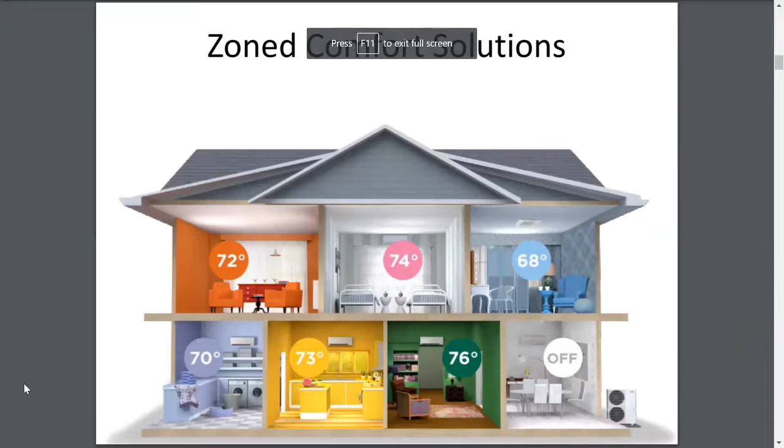Okay, Sean was talking a little bit about COP, coefficient of performance. I just threw this slide in here real quickly, but what we're talking about here is if you put 1 unit of energy into a system, how much are you getting out? In this example, it says 1 kilowatt of power coming into a heat pump and 4 kilowatts of energy coming out. So that would be a coefficient of performance of 4.

A more traditional electric system, non-mini split, would probably have a coefficient of 1. So you can see the efficiency differences are pretty significant. We're looking at 2.7 roughly to 4.8 in the equipment we're selling in the US. We do have one in Japan. I got an email this morning, I think it's 5.22, and it's running on R32 refrigerant versus R410A.

And we haven't brought that to the US. It's possible we could, but the unit is actually much bigger. So they think that aesthetically it may not be well received here right now. The Daikin, we got specs from them, and they had a mini split that was using R32 that had a COP, and we understand it's not exactly clear if their COP is the exact same testing regimen as our COP, but within that context, it was 5.8.

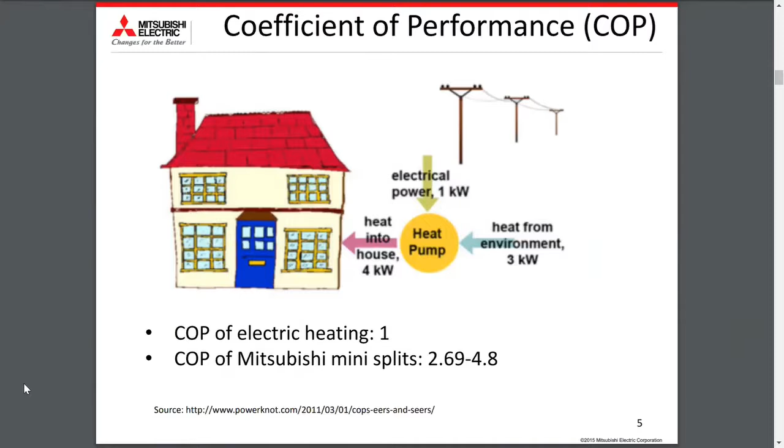Okay, yeah, that's very high. And I think they're one of the leaders in R32, so that could be part of it. That's their stuff, actually. Yep. Next, please. What is R32? It's a refrigerant. I mean, chemically, what is it? Sorry, I don't know. Sean, do you know? That's a long name. Yeah, it's supposed to be better in terms of GHGs.

Another point I wanted to make is, what makes these efficient is that we use inverter technology, and we have a very soft start. I don't know if any of you have traditional systems that when your air conditioning kicks in, you hear a loud boom.

I have one of those. It's right outside my bedroom window. It's not great in the middle of the night.

When ours start, they're very quiet, generally running about 3 amps only. So we call it the soft start. Then they ramp up, they hit the set point, and then they modulate around it, almost like a car on cruise control. Versus a traditional system, it would be fully on, 100%, off. Hits a set point, turns off. Waits for the temperature to drift, turns back on full speed. So think of it like a Prius versus somebody pedal to the metal and screeching on the brakes every time. Big difference there. Next, please.

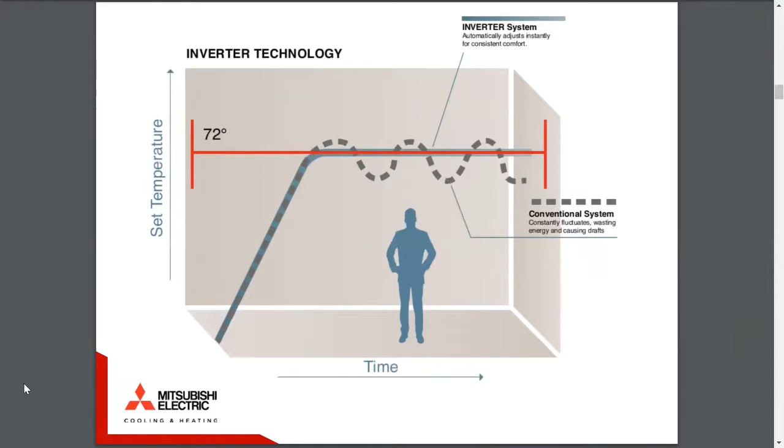One of our units, this is the FH series, is kind of interesting because it has a sensor built into it up there. And what that does is it scans the room. It does a thermographic image and it divides the room into, I think, 752 blocks. And it says, this part of the room is hot and this part of the room is cold, and it tries to homogenize the temperature. So in this example, you see 2 people sitting here. This person's sitting by a glass window. It's quite hot. So the vanes in this unit are going to point the cool air over to him and cool off that part of the room.

It can also tell if humans are present in the room. And if they're not, in 15 minutes, it will adjust the temperature up or down to save energy. And it can tell the difference between Rover and humans. So it won't react to pets. Next.

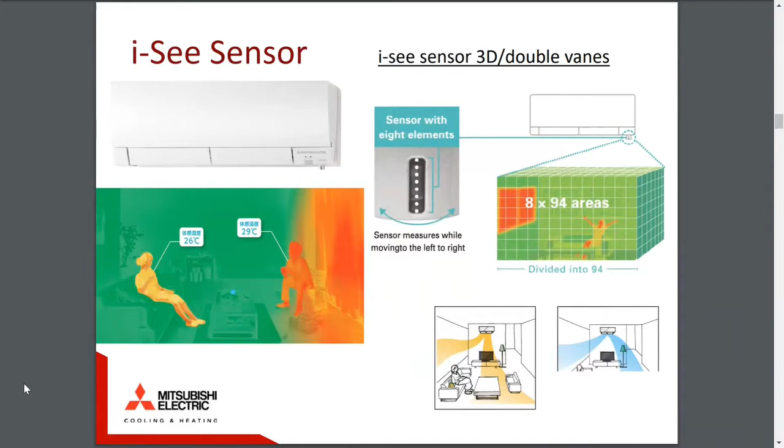So the units, if you're not familiar with mini splits, this is what some of the designs are. The top one is called a wall hung. This is the most common one. If you've traveled or even here, you've probably seen these. When I'm calling a new home builder, sometimes they say, I don't want to see those things on the wall. They're afraid buyers won't like the look of these.

So we have come up with alternative designs as well. A floor mount unit, ceiling cassette. This is brand new. It just came out in April, extremely popular. I'll show you an image of it later because I think it looks very good and people will accept that.

This unit is actually ducted, this one and that one. This one could go above a ceiling and have short duct runs hitting 2 or 3 rooms, like let's say a master bedroom, closet, and bathroom.

Yes? Is there some physical reason you couldn't build the wall with a cavity for that and inset it so that it was flush to the wall, face the wall? Which one? This one? Any of them. Is there some physical reason you couldn't do that? They have to have flow around them a certain way. Yeah, they do have return requirements. So the return, for example, on this unit is on the top, so you couldn't put it flush. You wouldn't get any airflow.

Can you put it in the soffit? Is there a way to put it in the soffit? I don't know. This one has to be horizontal, I know. It can't be vertical. I'm not sure. I've seen plenty of applications where there are built-ins, like cabinetry around them. Yes. So it can be tight up to it, but there's a way to really recess it.

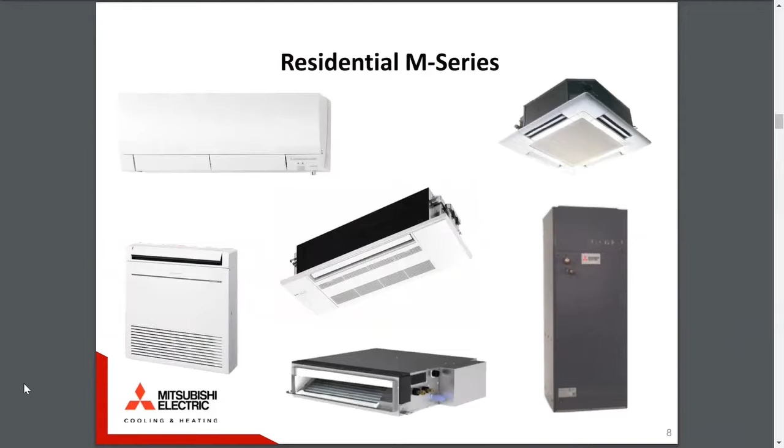And the way these work is you have an outdoor compressor, and then you can have one or more indoor units. Our largest one can handle up to 8 indoor units, and you can mix and match different types. Or you can do a one-to-one. Let's say you have a bonus room or a garage you wanted to heat or cool.

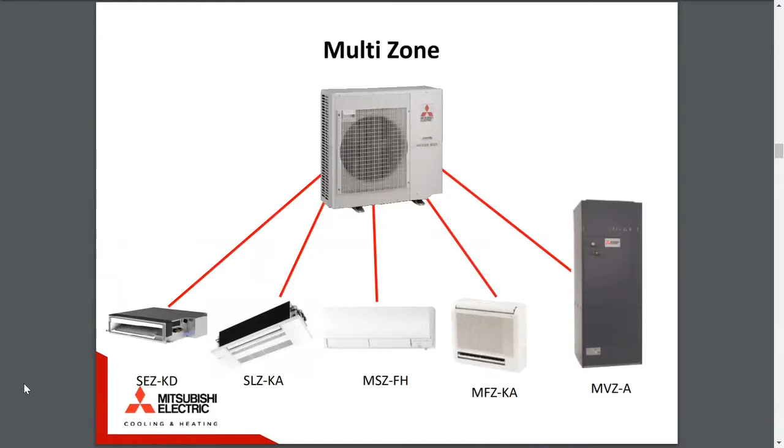If you do a one-to-one, that's very efficient and can get SEER ratings of up to 33, which is extremely high. To put that in context, the normal furnace getting installed today is about 14. The minimum requirement is 14. Sometimes you see 16, but you'd never see SEERs like this from a traditional system.

Next, please. All right, so switching gears now, this is a presentation from Japan, and you'll see the difference in Japanese presentations versus American presentations, stylized. But this is a product called Smart V2H, Vehicle to Home.

Amanda? I had a question from online asking, does Mitsubishi make a drop-in replacement for a gas wall heater yet? No, not for a gas wall heater. Can you repeat the question? Does Mitsubishi make a replacement for a gas wall heater, right? Yeah. No, we do not.

Can mini splits be used in commercial, like a classroom or office? Yes. What I'm showing is primarily residential, but there are commercial equivalents of all of these. Good question. Okay, so let's go to the next slide, and I'll tell you about this device, which I think is kind of interesting. Sorry, Amanda. Next slide. There we go.

Thank you. So the idea behind this vehicle to home is that you could potentially use your electric vehicle as a battery system. And I think that's attractive to a lot of people. One thing we have to keep in mind here is Japan is different than the US, because in Japan, when you go to work, you don't drive your car. You take the train or you take the bus. So your car is at home. And that has a different dynamic than if you're driving your car to work. You can't really do some of the things we're going to talk about here.

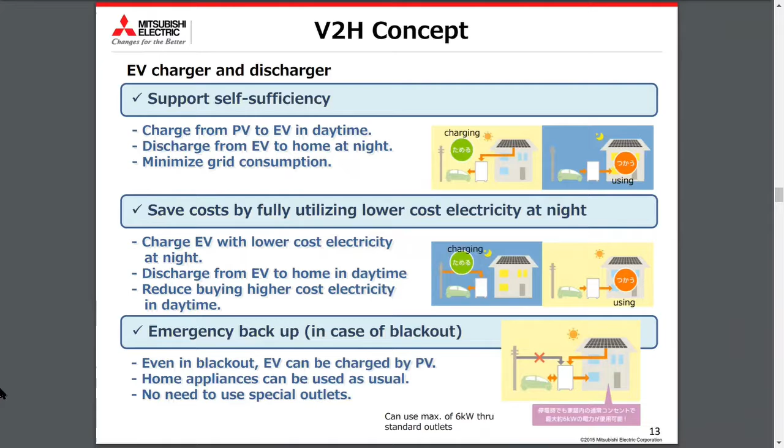And when's that coming here? I don't know if it will. To be honest, it has not sold well in Japan. Yeah, I think in Japan it's a perfect market for electric vehicles, but they haven't really been adopted in big numbers yet. And I say it's perfect because people don't drive much at all. I knew a lady in Japan who had a car for 10 years and she put 4,000 miles on it. Because you're just using public transportation all the time.

Yeah, I know, I wanted to buy it too. Excuse me.

So advantages, I kind of talked about this a little bit, but you have a lot more battery storage with the car than with a storage system. The amount of power you can draw is 6 kilowatts, which is, I don't honestly know, like the Tesla Powerwalls, how much you can draw at one time, but 6 kilowatts is quite a bit. And you don't have to tell it which appliances to power. It can be the whole house.

And it's saying here that it charges twice as fast. I think what they're referring to here is, if you're familiar with the electric cars, there's level 1, 2, and 3 charging. With this one, you get level 2, which is kind of the 5.5-hour charge versus 10 to 20-hour charge with a normal 110 outlet. Next, please.

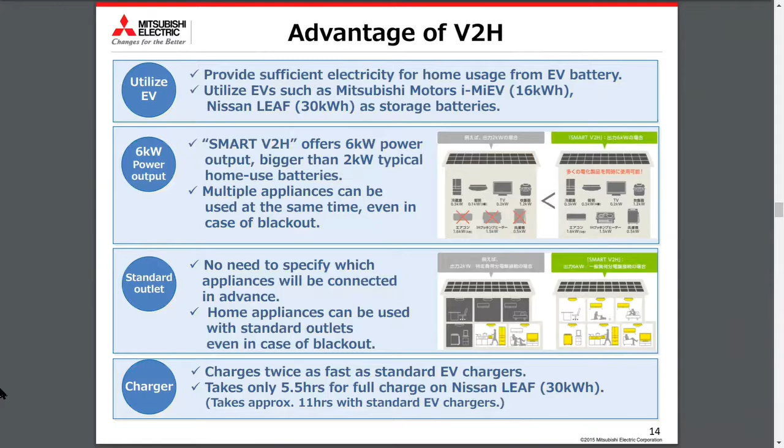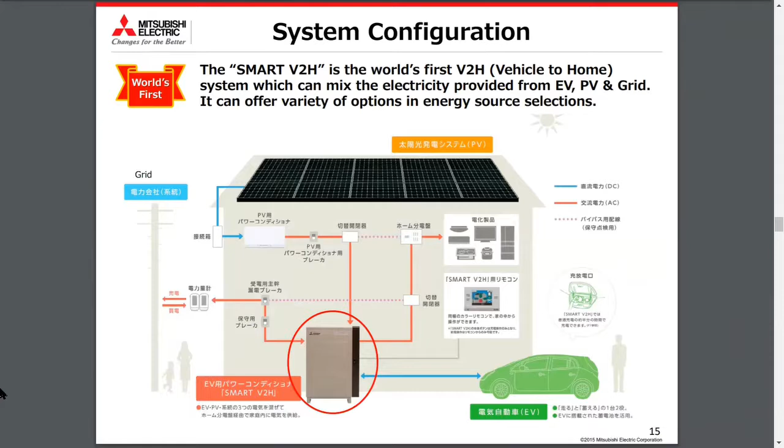You didn't think I'd have to step up here, did you?

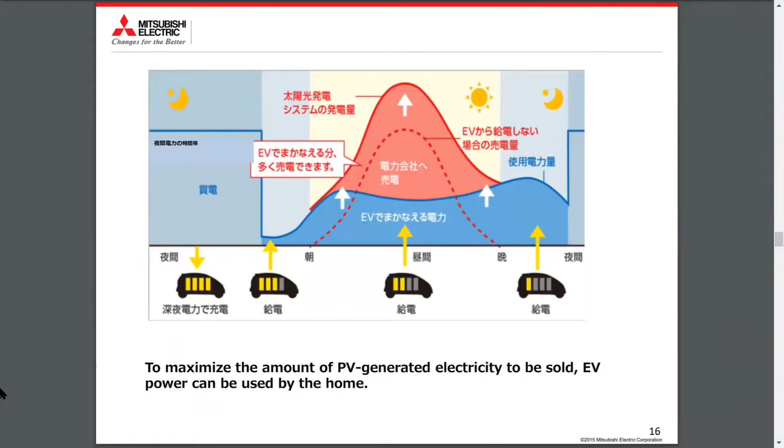I'm sorry, before we move on, I'm just curious about the price of that unit, if you happen to know. I don't, but I can find out easily. Yep. Going back to the EV home, Sean knows I've been looking into this as well, but one of the things I've run into is auto manufacturers not wanting the power to be drawn. Yes, I've read that as well. Are there certain vehicles that are on board with that over in Japan? I don't know what their position is there, but I know that is a concern with auto manufacturers. I don't think they've limited it in their warranties yet, at least I haven't seen anything. But what they're afraid of is just more cycling and wearing out the batteries sooner.

As far as the technology goes, do you know if the car batteries will allow that to flow back? Yeah, with this device they will. I don't know how many have been tested in Japan. They do mention the Nissan Leaf and the Mitsubishi i-MiEV as options, but I would think most cars it would work. It'll probably depend a little bit on the interface for charging. So I'm not sure about the Tesla, for example. That's a little bit different. Okay.

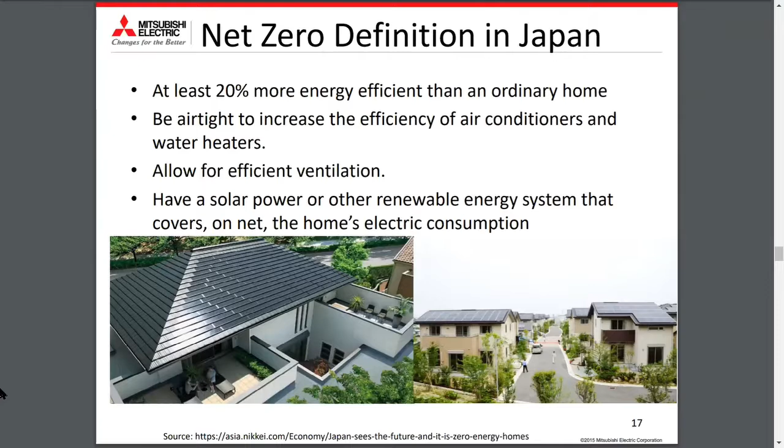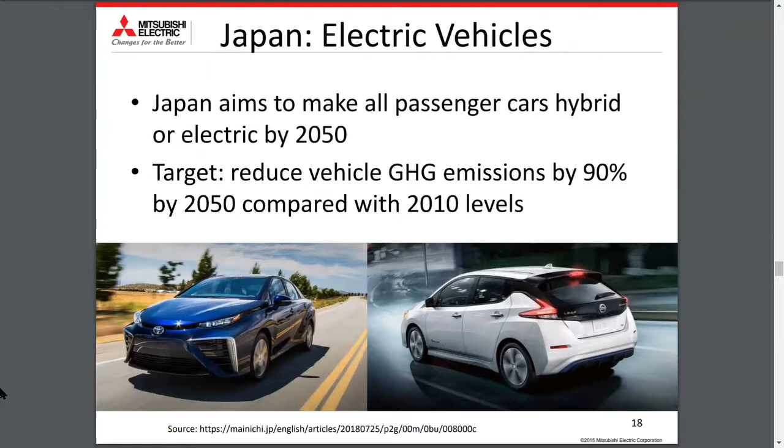Japan has led the way in hybrid technology, as I'm sure you know, with the Prius and other cars. They're also doing hydrogen fuel cells. I don't know if you've seen the Toyota Mirai. Honda also has a vehicle. The Nissan Leaf has been a global leader, obviously, for electric vehicles, and now the range has been extended and they look much more stylish. So hopefully Japan can beat this, but that's what their target is. So let's go to the next slide.

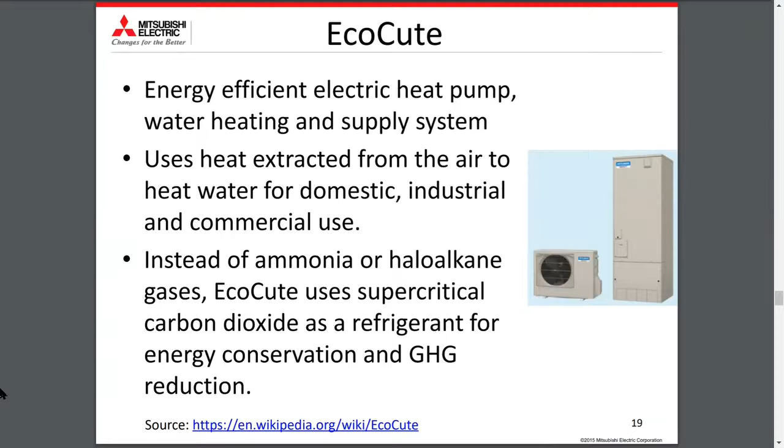Yes. How is supercritical carbon dioxide different from carbon dioxide? I was afraid you were going to ask. I tried to go quickly. Really important. We'll talk about the physics of it a little bit. I do have something technical I could email you on that. Oh, okay, good. I'm a little later.

Okay. But basically what happens is that at very high pressure, the carbon dioxide becomes something that's not a liquid and not a gas, and certain properties that are valuable exist under these very high pressure conditions. Okay, thank you, Michael. So the EcoCute is a split air to water. Yes, exactly.

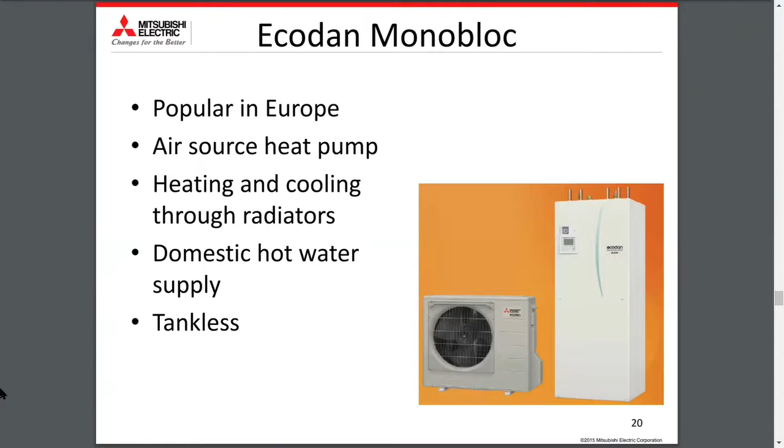This unit is called Ecodan, and we do make this and sell it in Europe. And it's used for two purposes, which is great. It heats and cools homes and uses the radiator systems that are common in England still. And then it can heat the domestic hot water, and it's tankless. So that's nice. Next slide. You said tankless? Tankless, yeah.

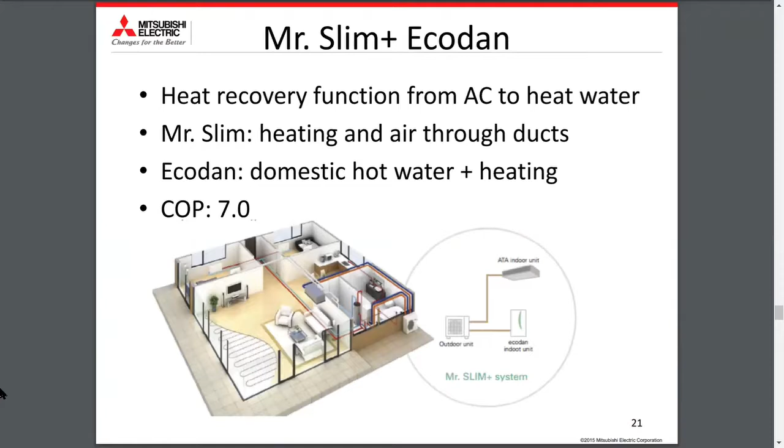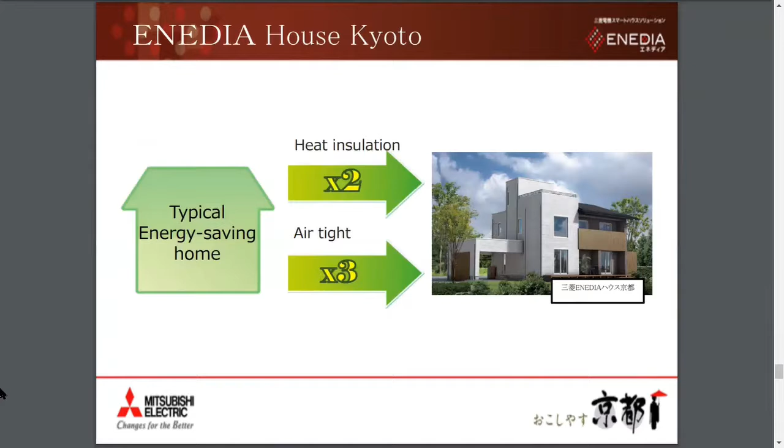And they're PV powered. They do have storage. They do have these vehicle-to-home chargers and dischargers, and they're very efficient. And I think I'll go ahead to the next slide. Okay, so the insulation is 2 times better than normal and more airtight compared to a traditional home. Next. And run again by a home energy management system called HEMS. Let's go to the next slide.